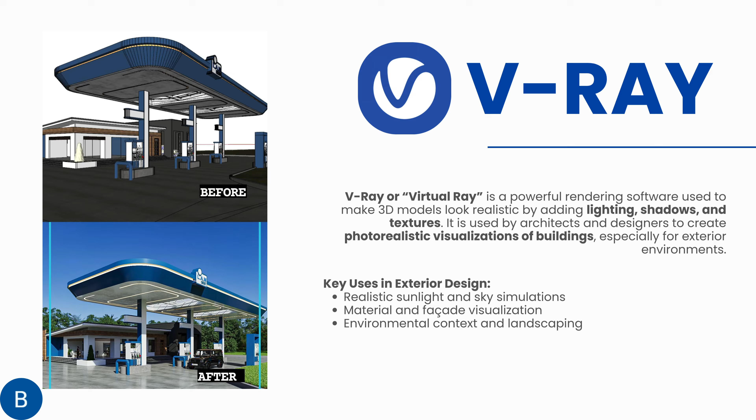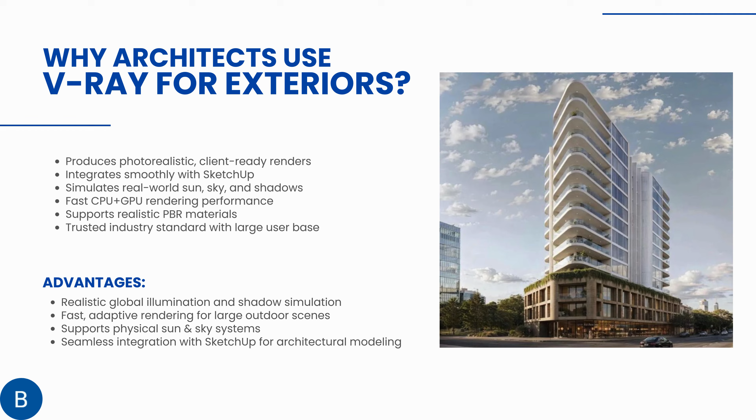Now let's look at its advantages: realistic global illumination and shadow simulation, fast adaptive rendering for large outdoor scenes, support for physical sun and sky systems, and seamless integration with SketchUp for architectural modeling.

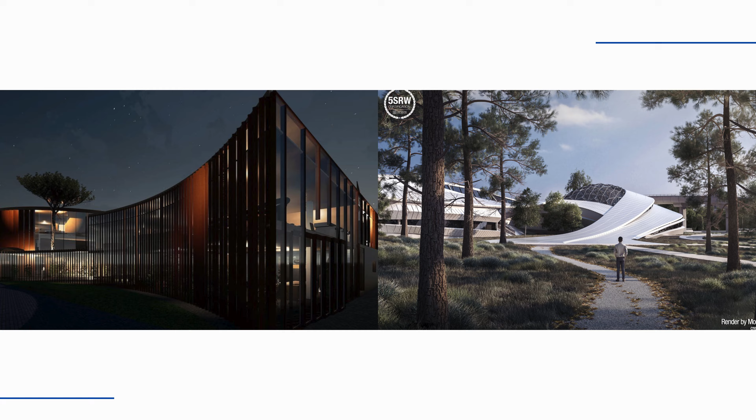Hello everyone. Today I will teach you a basic workflow on how to use V-Ray. This topic will cover project setup, materials, lightings, camera or perspective compositions, and rendering outputs. So without further ado, let's start.

Setup: first, you need a SketchUp model and V-Ray software installed. This time I will use the bungalow project. Once you have V-Ray installed, these tools will appear in your SketchUp interface. If not, you can find them under View, then Toolbars, and turn it on there. Also, V-Ray is compatible with several software such as SketchUp, 3ds Max, Maya, Rhino, Revit, etc.

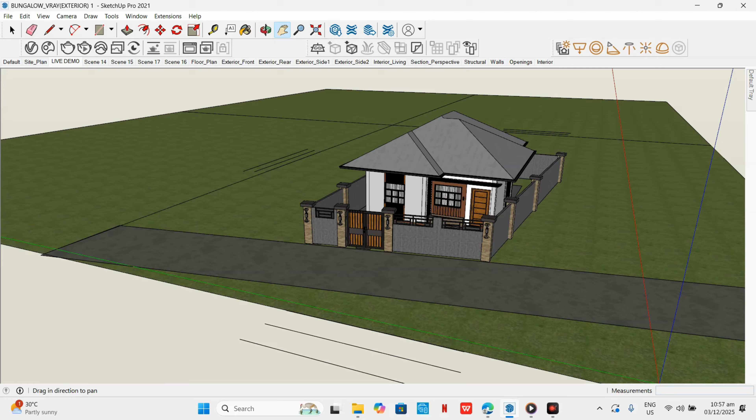For file size consideration, any file size will do. Just note that the higher the file size, the longer the render time, and it will be harder to move through the model. For materials, V-Ray, like other modeling or rendering software, has its own material library where you can download assets you need for your model.

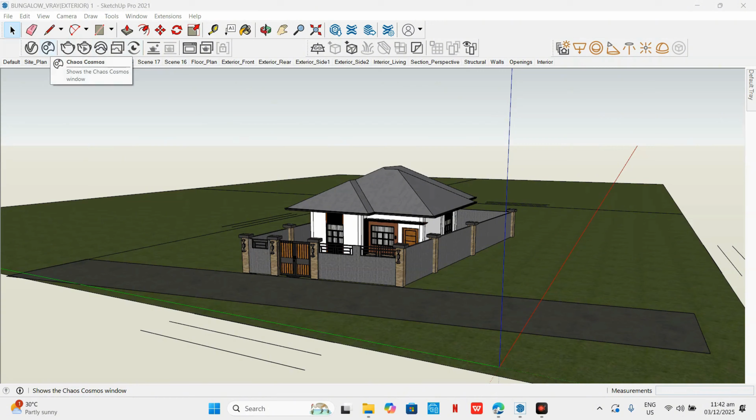In V-Ray, this library is called the V-Ray Chaos Cosmos, which can be opened by clicking this icon. A floating window will appear where you can choose and download the 3D models you need for your project. Since we're focusing on exteriors, I will focus more on vegetation, especially trees. To download a model, simply click this button and it will start downloading.

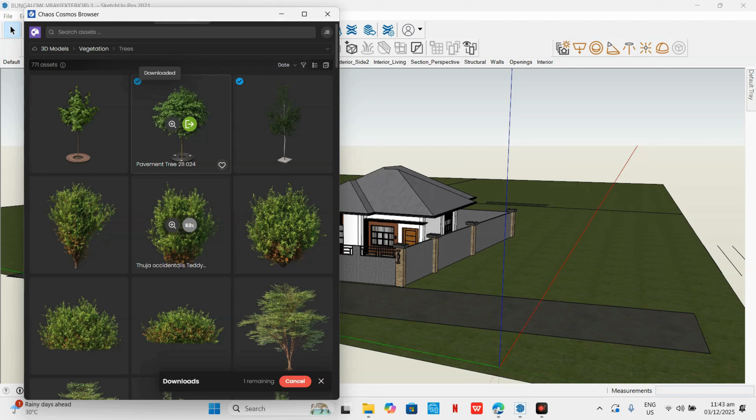You'll know the material is ready for download once this icon appears at the top, and then you can use it in your model by clicking this green button. I already prepared a scene without vegetation, and you can simply place what you downloaded wherever you need it in your model. Let's place it here, and here, like that.

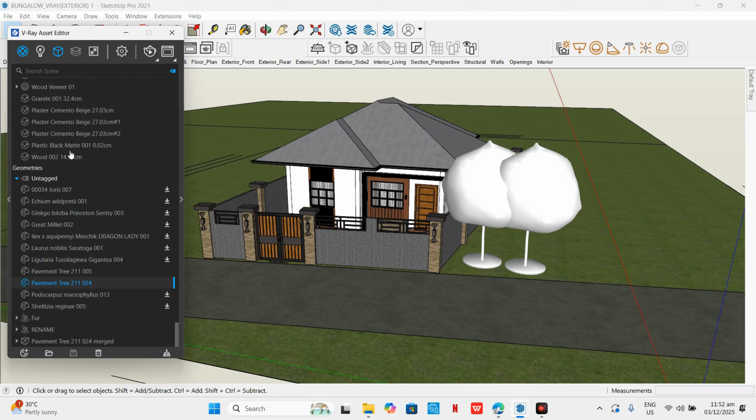If you want to edit the properties of a certain material, you can do so by clicking this icon, which opens the V-Ray Asset Editor. It's like tags or layers in SketchUp. Let's try it on this wall. Find the layer for this material here — for this one, it's this. Then click this arrow, which opens a panel where you can edit the properties of the material you want.

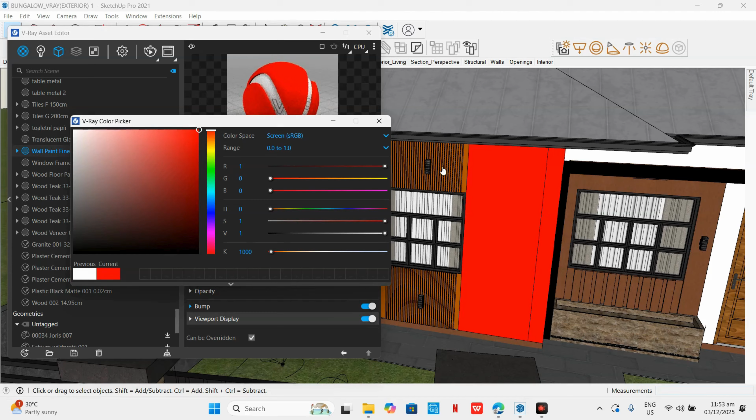Let's say I want to color this red — like that, it shows up on the model. You can also edit the reflection, refraction, like that, here's the opacity or bump setting. Basically, you can do everything in here.

Lightings: setting up lightings here in V-Ray is fairly easy. There's artificial and natural lighting — let's focus on artificial lighting for now, then later on natural lighting.

Using this set of tools up top, you can set up your own lighting effects by using different types of lights. For example, this one will give you a rectangular lighting effect, perfect for general lighting, and this one will give you sphere lighting, and this one will give you spotlights.

Explore more on your own for more info. This one is for dome lights. This is a bit technical, but here you can use HDRIs that you can also download from Chaos Cosmos.

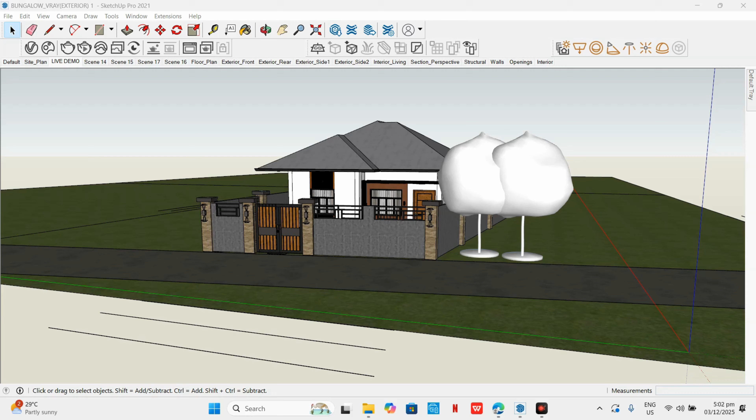Now for natural lighting. You can set up your natural lighting effects by going into the Asset Editor, then go to this Lights panel. Here you'll see the lights you placed on your model, like spotlight, sphere light, and dome light.

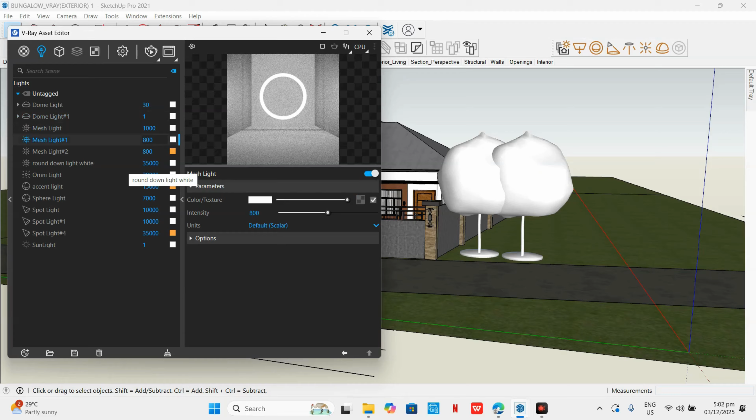As well as the ones you added from Chaos Cosmos, like this one or this one. But for now, let's focus on sunlight. When you click this tag, it will open a panel where you can edit everything according to your preference.

For example, the time, the color and intensity of the sun, the sky, and clouds as well. Camera composition: we already know the different types of camera angles such as aerial view, man's eye view, bird's eye view, etc. that you can use.

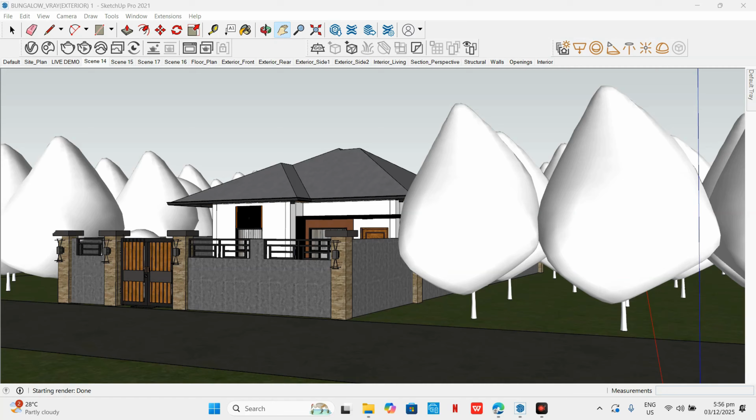So you can just select one that suits your preference or the one that you need. Also, if you go back to the Asset Editor, then to Settings, you'll see the setting for the camera. Here you can enable and adjust the exposure that will affect the brightness of your image. You can also enable depth of field and everything else.

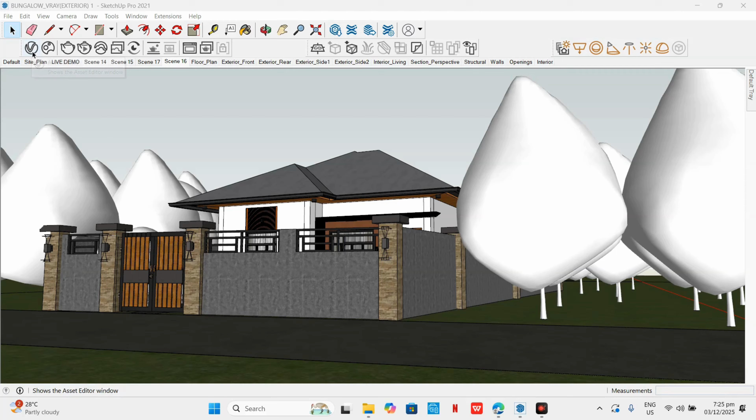If you go back to the Asset Editor, then to Settings, you'll see these two things related to rendering. Let's start with the first one. If your PC is running a higher CPU, you can use this, or if your GPU is higher-end, use this one instead.

For the quality of the output, you can set it to high for the final output, or lower it for drafts. For the denoiser, it's better to use Intel Open Image if your CPU is stronger, or NVIDIA AI if you're using a GPU.

For the second setting, this one is all about your rendered output. Here you can adjust the quality of your image, like whether it's 4K, 1080p, etc. Search for the equivalent settings you need and put them here.

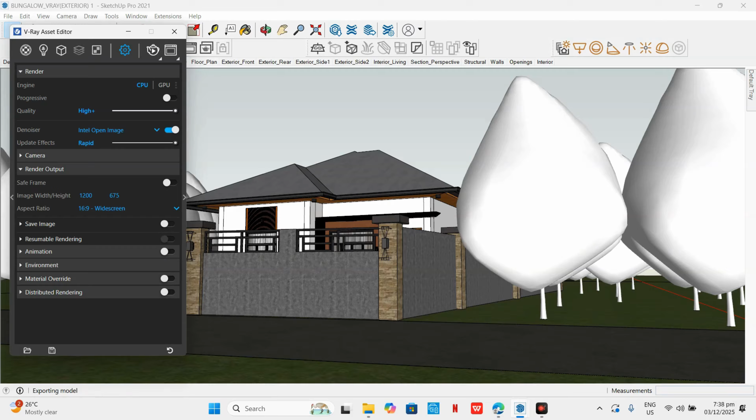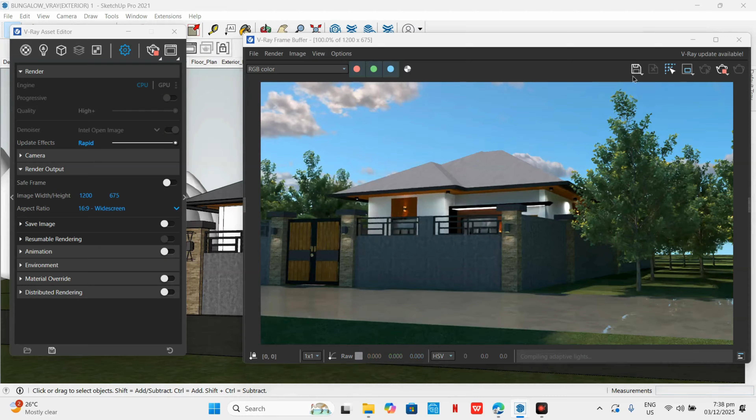Once you're done, click this icon to start rendering. Once it's finished, click this, then go to the folder where you want to save it, add a file name, let's say 'exterior', choose the file format, preferably JPEG, then save.

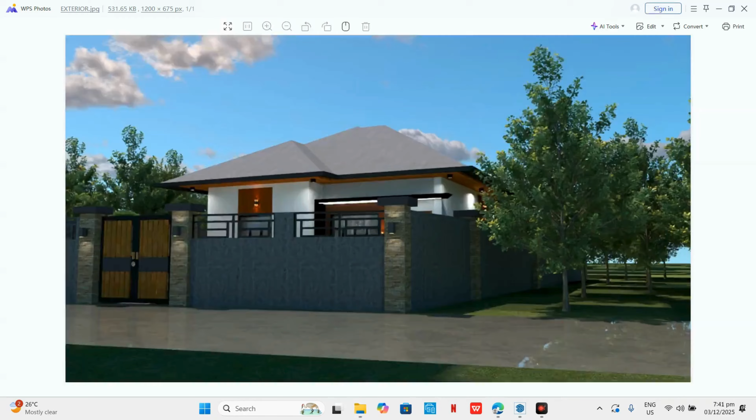So let's check. There it is. Remember, rendering time will depend on the weight and number of assets you put in your model, so don't overcrowd it. Keep it simple; as long as it's organized, it'll work. I hope you learned something from this video. Have a nice day.

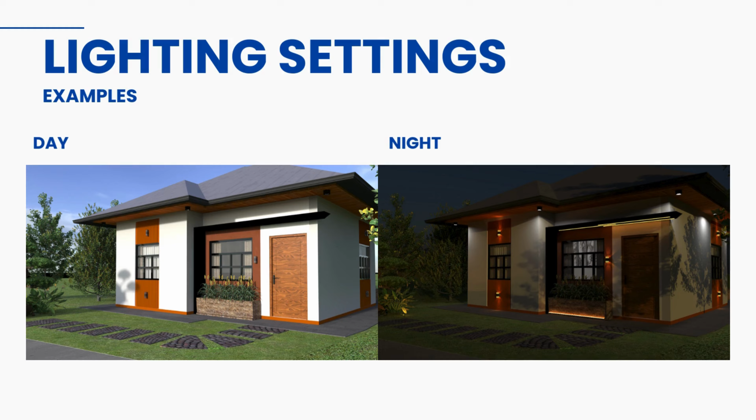So pag-usapan natin yung material settings. Unahin natin yung bump map and displacement map. Yung bump map or normal map ginagamit siya sa mga fine details like wood grain, light scratches, saka mga fabric texture. While yung displacement map naman ginagamit natin sa mas malalaki or visible na details like mga bricks, mga cracks, stones. So unlike bump map, yung displacement map mas nagkikreate siya ng physical depth and mas realistic yung materials.

Proceed tayo sa reflection and refraction. Ma-adjust mo to sa mismong tab ng mga materials. Yung reflection yung nagko-control kung gaano ka-reflective yung surface, makikita mo dito yung white. I-adjust mo lang yung white - mas white, mas reflective. Kapag nag-dark naman siya, mas less yung reflectiveness niya.

Sa refraction naman, na-adjust mo to kung gusto mong mas magmukhang transparent yung materials. Kadalasan ginagamit to sa mga glass, plastic, water, o yung mga crystals. Paano to gamitin? Yung white, kapag in-adjust mo siya ng mas white pa, mas transparent yung kalalabasan ng materials. Kapag in-adjust mo to na mas dark, mas less transparent yung materials.

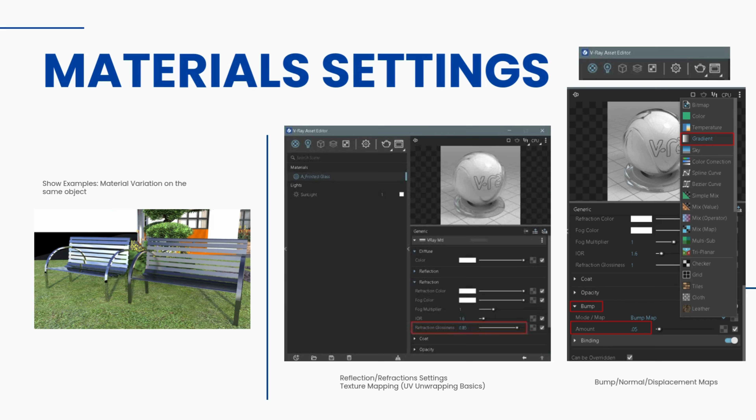Good day. I'll be showing to you guys the before and after results of our post-processed renders. For this edit, I used Photoscape. I focused on enhancing the original render by adjusting a few key settings.

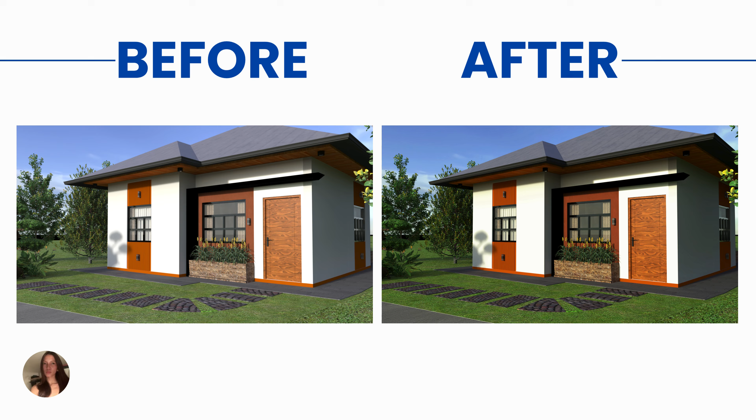First, I slightly increased the exposure para mas maliwanag ng konti yung overall scene. After that, I adjusted the vibrance and contrast para mas buhay at mas saturated yung colors since medyo dull yung original render. Naglagay rin ako ng konting dehaze para mas clear at mas deep yung tones. And I also adjusted the white balance para ma-balance yung warm and cool tones at para ma-achieve yung more realistic color output. For this render naman, I also adjusted the exposure and lightened the shadows a bit para mas makita yung darker areas. After that, I adjusted the vibrance, contrast, and saturation para mas mag-pop talaga yung colors, especially yung lights, since night scene siya.

Itong adjustments nakaka-help siya para mas ma-enhance ang mood at maging mas vivid at realistic ang lighting. And for this render, same process lang as the previous one since same time setting sila. The only difference po is yung camera angle. Dito rin I focused more on enhancing the dehaze para mas deep yung colors and mas malinaw yung details.

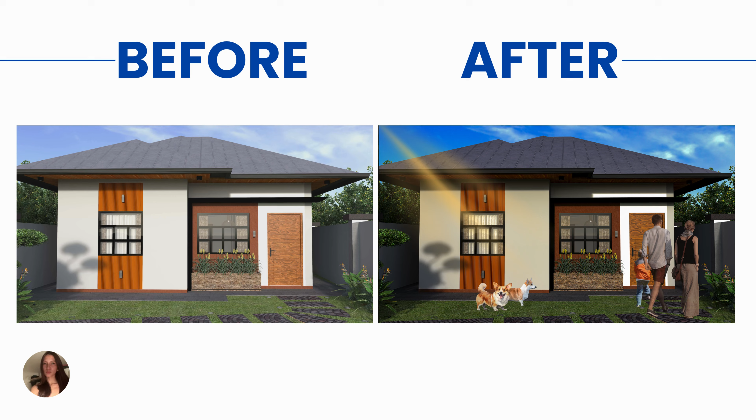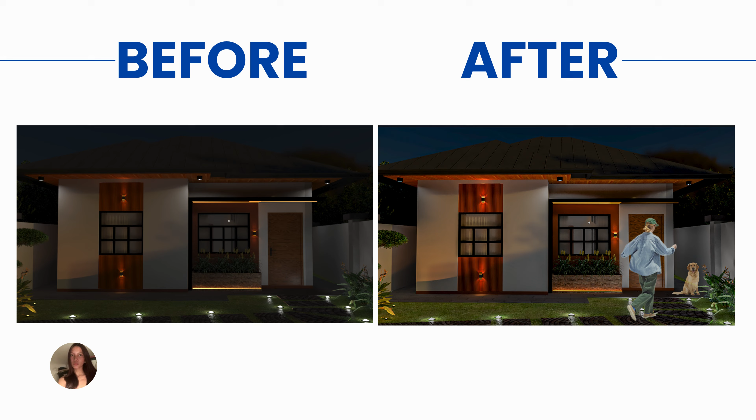May mga inilagay din kaming some additional samples from different angles of perspectives, and we also inserted people in the scenes para mas magmukha itong realistic. Overall, the V-Ray outputs were already good, so minimal adjustments na lang ang ginawa namin, just enough to improve clarity, make the colors a bit more vivid, and keep everything looking natural and realistic. So that's it for the post-processing workflow.

This time, let's talk about the common V-Ray problems we usually experience and their solutions. Here are the tips, tricks, and common issues of using V-Ray. Andito yung mga essential keyboard shortcuts. We have the shortcut for Quick Render, Material Editor, Environment Dialog, Isolate Selection, Render Setup, Show Safe Frame, and Zoom Extents.

Here are the hidden features most beginners don't know. Dito may apat na nakalista, which is the VFB Light Mix para sa pag-edit ng lights, color, and intensity. Next is the Material Override para sa pag-edit naman ng material complexity. Interactive Render para naman sa pag-sculpt ng materials. Chaos Scatter para hindi na kayo mahirapan mag-edit ng trees and grass. Dito naman nandito yung mga asset libraries na pwede niyong gamitin. Dito naman nakalista yung mga pwede niyong gamitin na plugin recommendations and community resources.

Moving on, here are the common problems and solutions sa paggamit ng V-Ray. You can just pause and read. Andito naman yung mga learning resources na pwede niyong gamitin para mas matutunan niyo pa ang paggamit ng V-Ray.

So, after learning the tips, tricks, and common issues, we're now gonna show you our final renders.